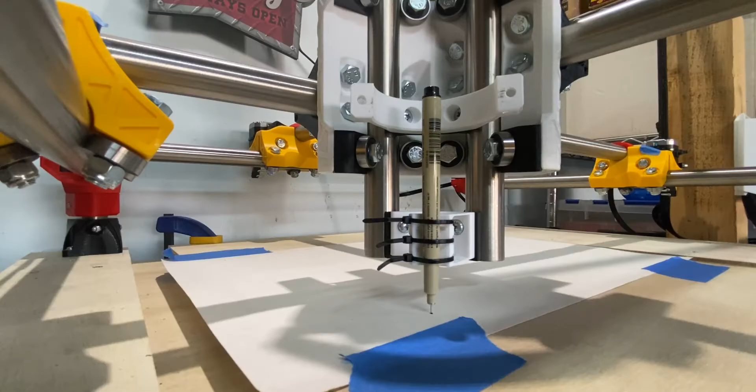HMC's stated strategic planning goals is to leverage the digital advantage, and more specifically to move into digital fabrication, where we're moving away from printed documents into digital documents. And so one of the things that I wanted to begin to explore is how could we begin to use digital fabrication in the designs that we're already doing at HMC.

You know, there's a number of cool things that are happening in tech companies, in academic circles, as well as in some specialty design firms. But that's not the norm in the industry, and it's also beyond the reach of what we can do right now at HMC. And so if you watched any of my videos from last year, you know that I built a CNC in order to begin to explore digital fabrication in our designs.

As a first look, I've decided to use a feature wall that we designed for Antelope Valley College for their new classroom building. Now this is going to be a main classroom building on campus, and so we wanted to design a space that really gave the students a place to hang out, to meet with friends, to study, where they had a place to go in between classes and didn't feel like they needed to leave campus.

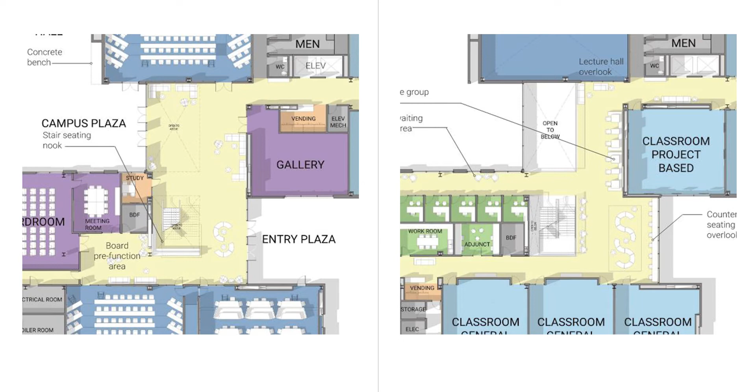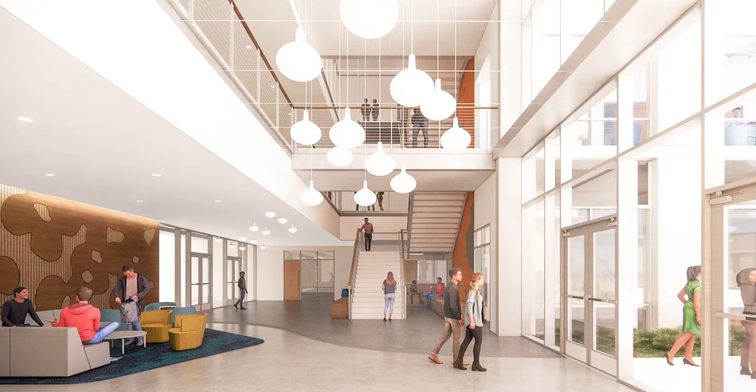And so as part of that atrium of that lobby, we created a feature wall that spans across 2 stories. Now this project is located near the California Poppy Reserves, and so the client chose an abstract look at poppy flowers for the design of this feature wall. And the wall is envisioned as a series of wood slats and solid wood sections that make out the outlines of flowers.

And so using the concept that the wall could be broken into a series of 4x8 sections of laminated plywood, the idea is that each one of these could be milled with a large-scale milling machine. And so I've created a 1/16 inch scaled down version of this to mill out a single one of these panels and get an idea of how the process would work.

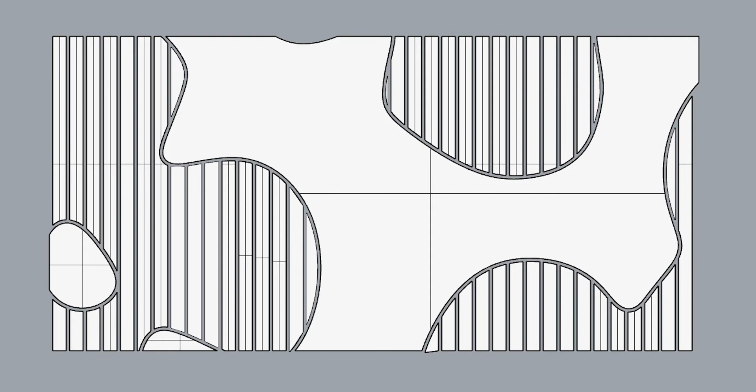And so what happened with that is our Rhino model, our design model, became now part of the fabrication process itself. So in order to produce the G-code, which is the instructions that tell the CNC how to mill the panel, I'm using a software called Estlcam.

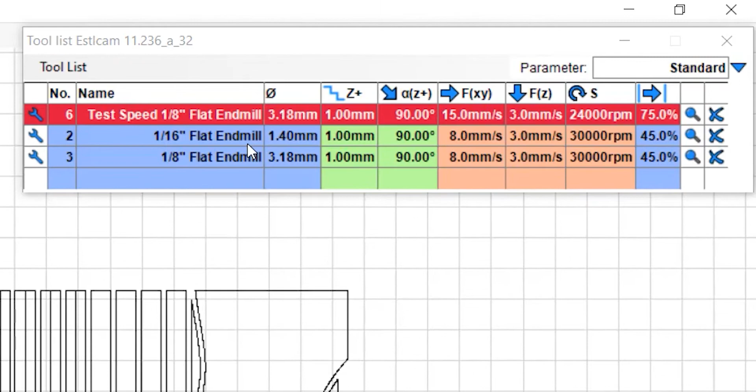And so instead of producing drawings that show design intent, I'm actually now producing the actual fabrication process of the panel. I'm not just designing details to show the desired outcome, but I'm actually designing the tool paths while taking into account the limitations and the possibilities of what the tool can do itself.

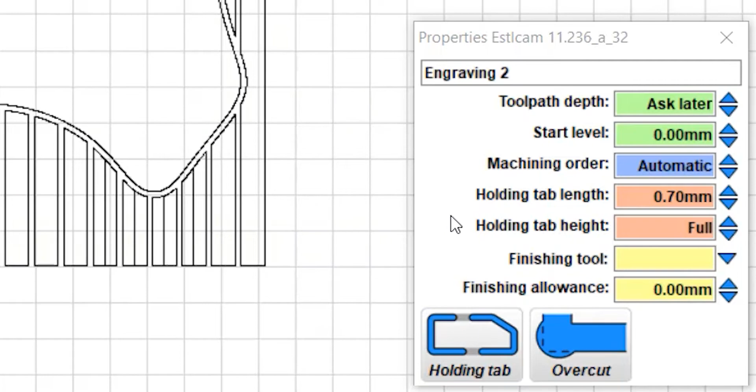So in this example, since it's my first attempt at doing this, I'm not really looking to optimize how the milling process goes, as you can see here in this program, but instead I'm just trying to get a basic idea of what it would look like. Let's do it.

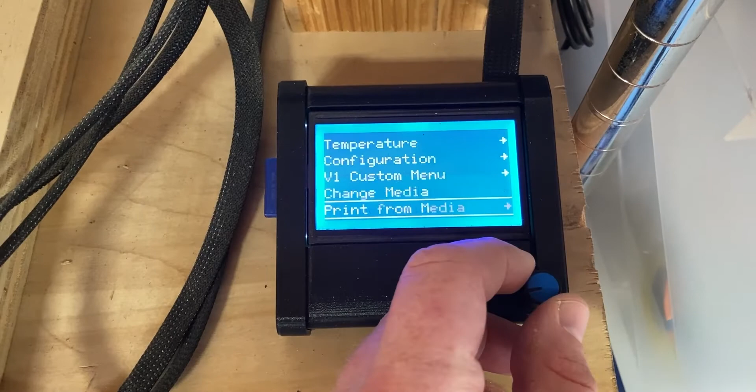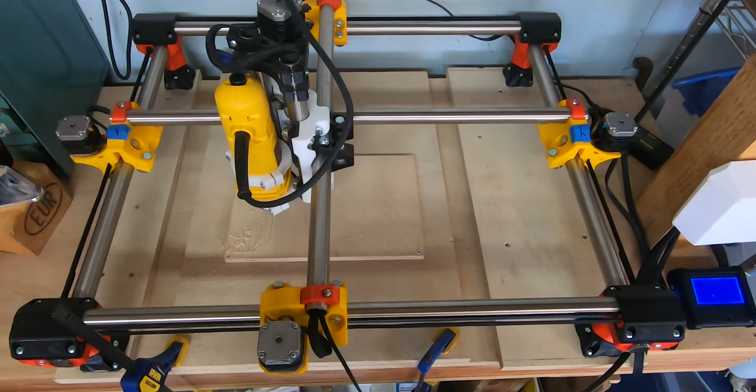Now I know it doesn't take into account DSA or OSHPD challenges or questions in liability of construction or contracts, but I hope you find it as interesting as I do, as a look of what moving from producing drawings that just show intent into producing actual digital fabrication information. And hopefully it's also inspired you to look at some different ways that you can consider digital fabrication for your design projects.